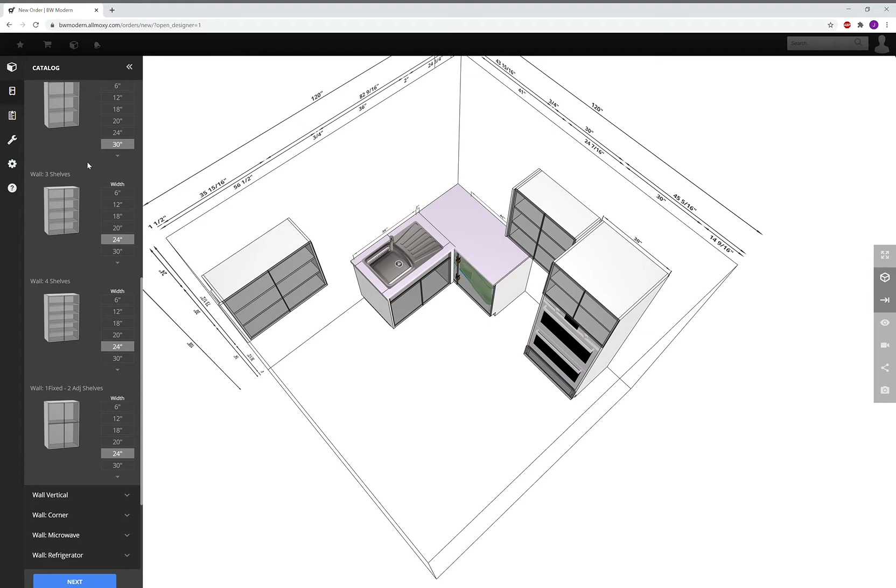Let's go over a couple examples of how I would use columns. This is our starter design from our applied ends video. I'm going to go down to ends and fillers, which is where the columns are located. We've got some different column options: base columns, wall columns, and tall columns.

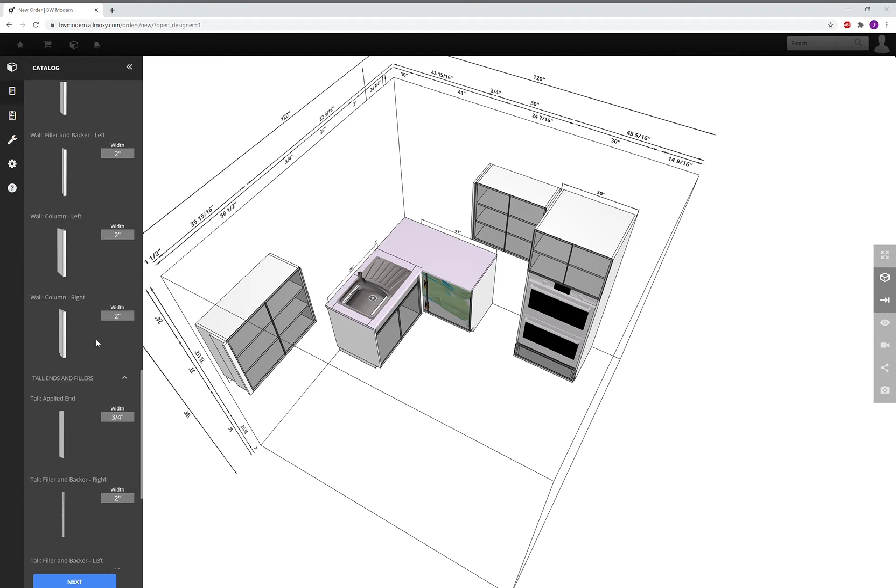Maybe I want to put some nice big substantial columns on this oven cabinet. If I click on this, I can see my closest tab here. I'll move this cabinet 3 inches off of that one. My end panel didn't like that, so I'll fix that real quick. Now I've got a 3-inch space from this upper to this oven cabinet.

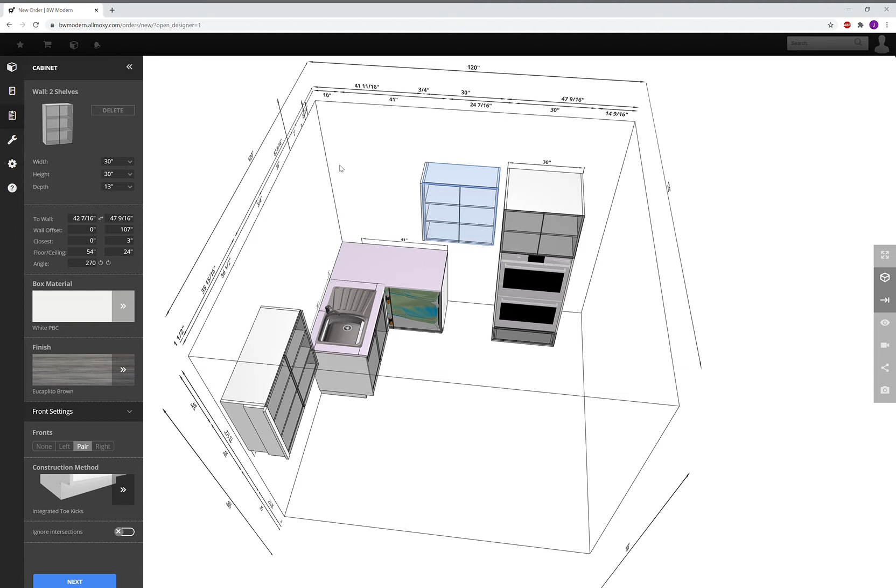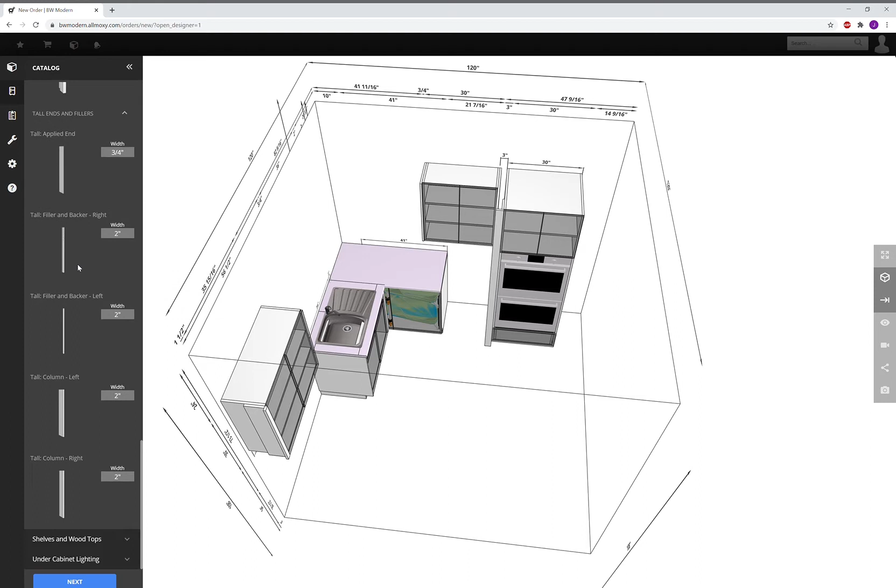I'm going to grab a tall column for the left, bring it in, stick it to the cabinet, and change it to 3 inches wide. It'll fix itself there. Then I'll grab one for the right hand side of my tall cabinet, stick it to the side, and make it 3 inches wide as well. You can make these columns any width you want—I'm just doing 3 inches because I like that size.

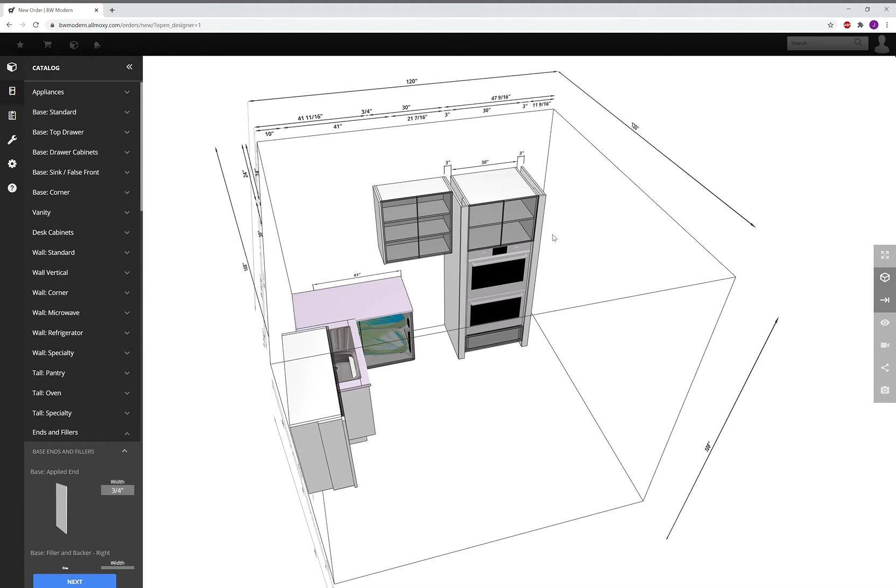Now you can see when we've added these columns, it gives that cabinet a really neat, substantial look—it looks like it's got legs on it. That's a neat way to use columns in a tall cabinet fashion.

Now there's another cool thing we can do here. Say I move this cabinet over to my sink cabinet, put it out here like this, and then grab the depth. I'm going to make the depth 26 inches deep, so that base cabinet is just a little bit deeper.

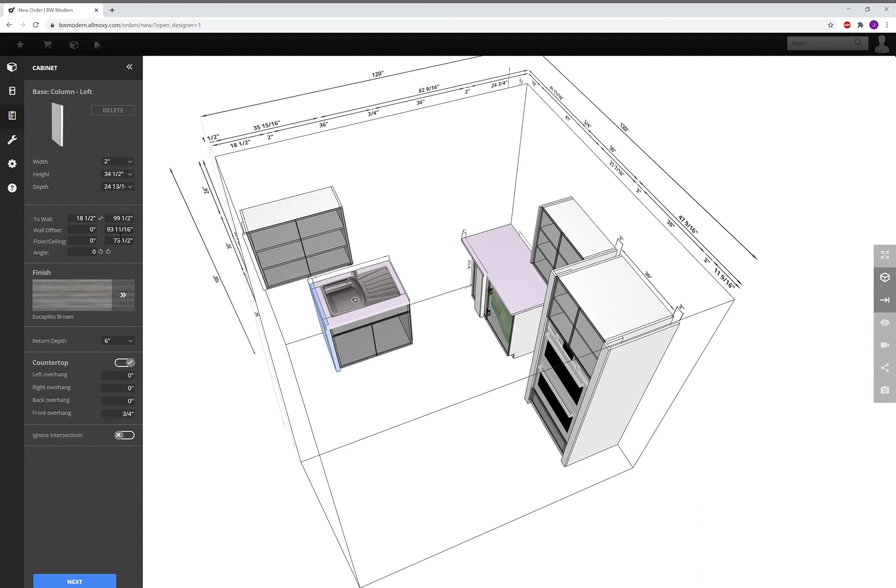Then I'm going to grab a base column left and stick it to it. I'll make that one 26 13/16 to match that depth, and make it 4 inches wide. So now we have a big leg on our sink cabinet.

So that was a left-hand one. Let's grab a right-hand one, bring it in, and make that one 4 inches as well. I'm going to change this depth to 26 13/16, and then move it over to the side of the cabinet.

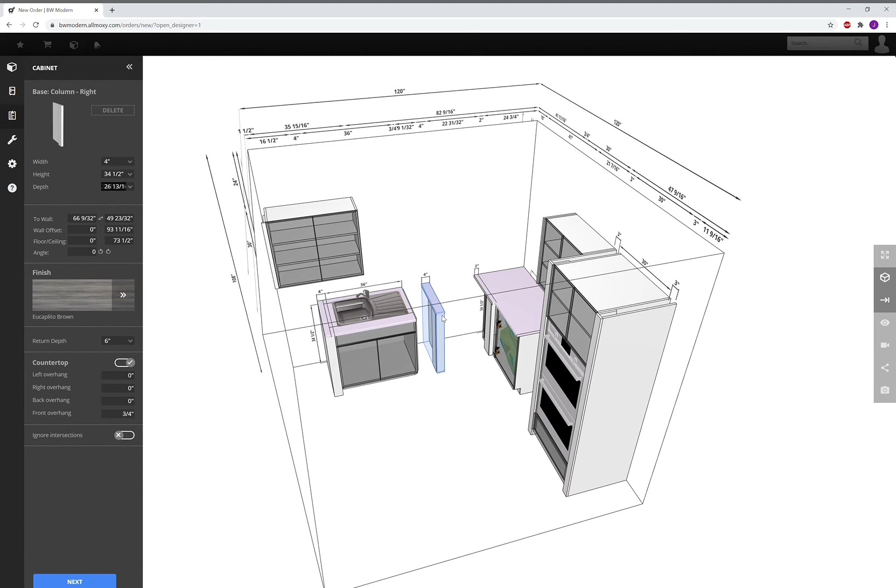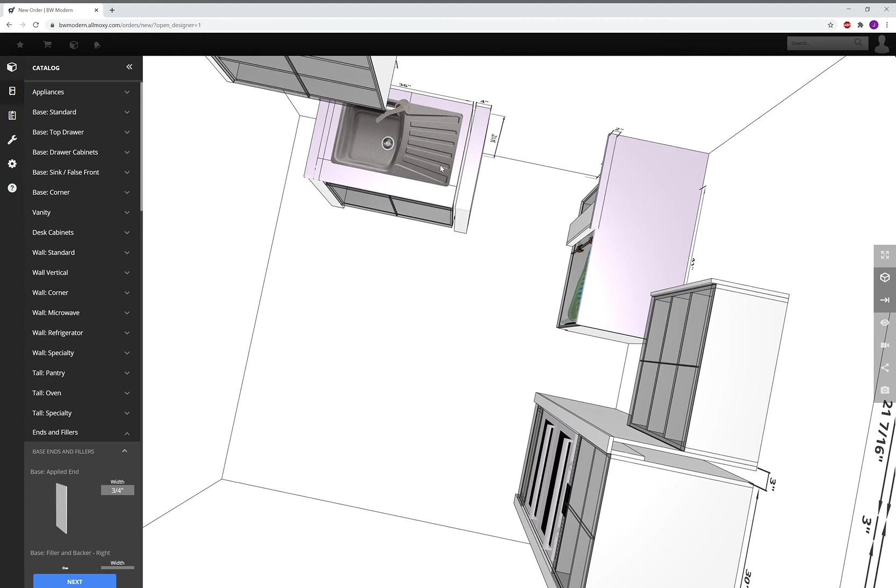Now this has given us a really cool kind of leg. Oh, there's an end panel there—let's get rid of that since we don't need it. Then we should be able to slide this over. Okay, so now we have our columns on either side of that sink cabinet.

Just to show you what it's going to look like, if I bring in a couple standard base cabinets that fit alongside it—we're not putting a lot of time into figuring out math for fitting a room, just showing how the columns look. Now we've got a couple 24-inch deep base cabinets on either side of our sink, and a 26-inch deep sink cabinet with a couple 26 and 13/16 columns on it.

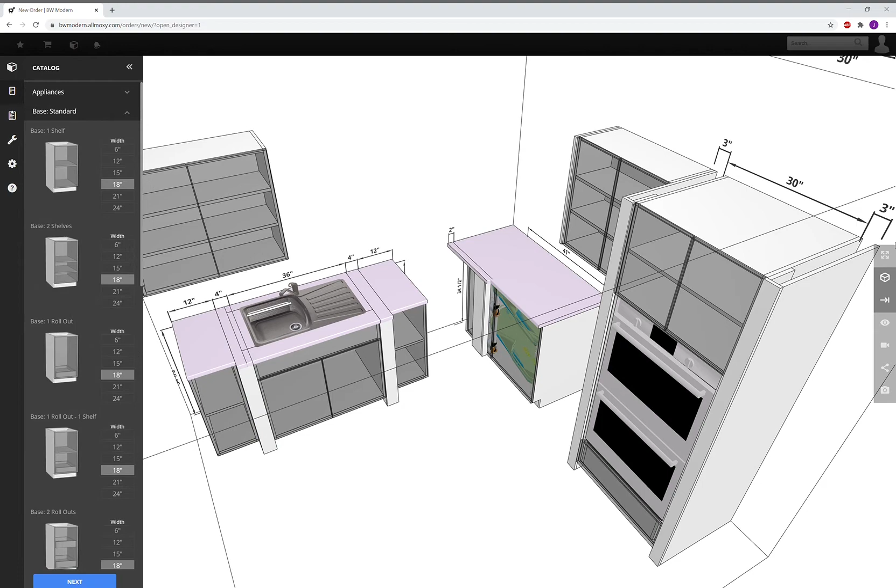Now when we render this, let's take a look at what this looks like. So now we've got a bumped out sink detail here with a couple legs on it—really a neat design.

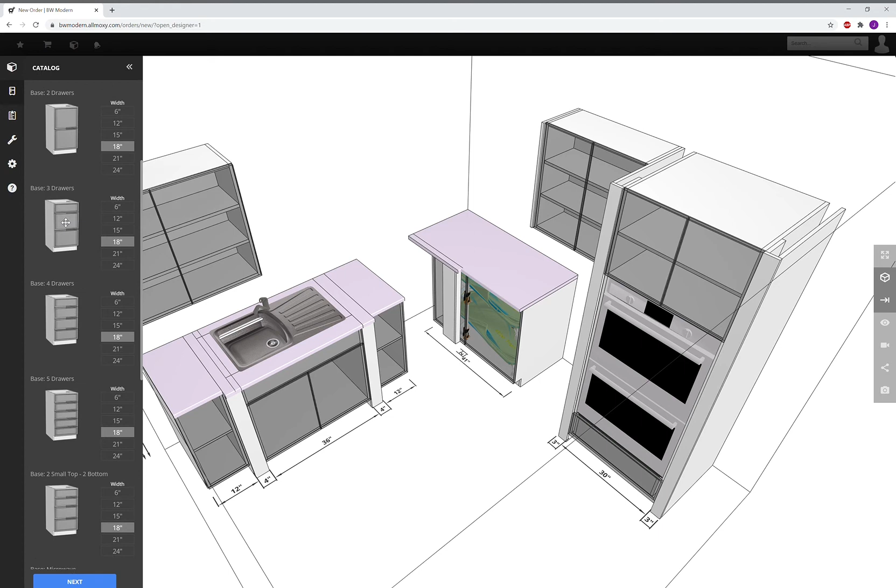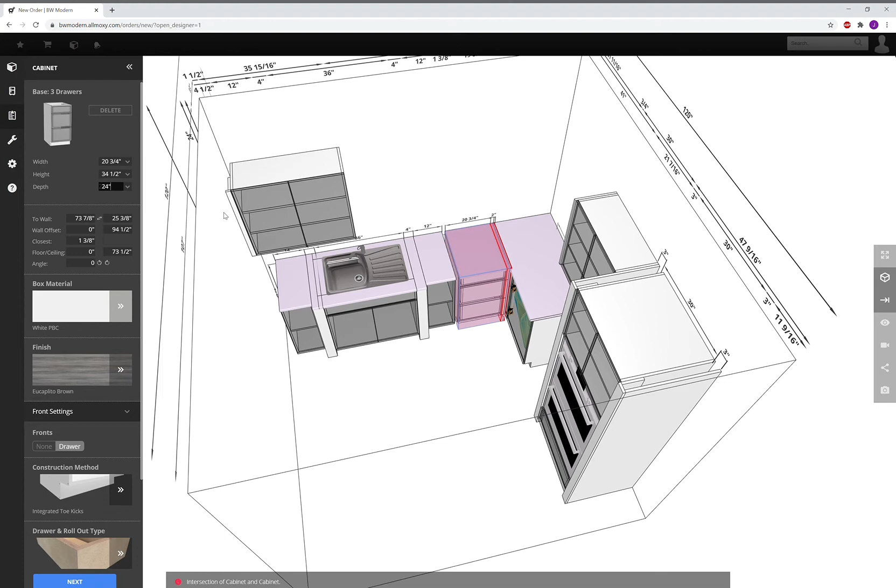I'm going to throw a couple more cabinets in here to finish up that corner so we can get a good idea what things look like. I'm going to come over to my drawer cabinets and grab a drawer. This also brings up a good point in kitchen design: I've got this cabinet at 18 inches wide, and the closest number here is 2 3/4. If I make this cabinet 2 3/4 bigger, which would be 20.75, since we can do all custom sizing, that's going to fill that gap.

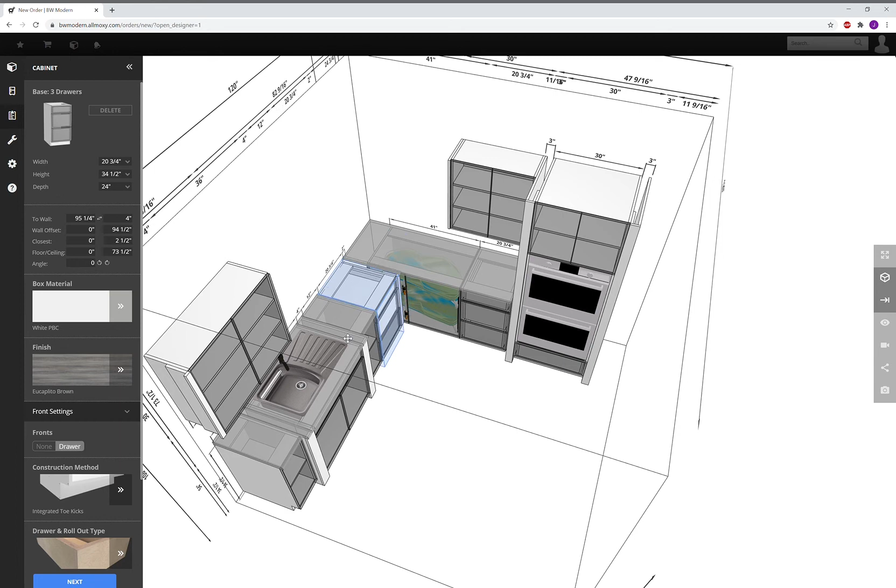Then say I want another drawer bank over here. It looks like I need 21 and 9/16. Let me get this in the right spot, and then I can make this one 21 and 9/16, since we have full ability to make things completely custom. Let's see what we've got to do to make this thing happy here.

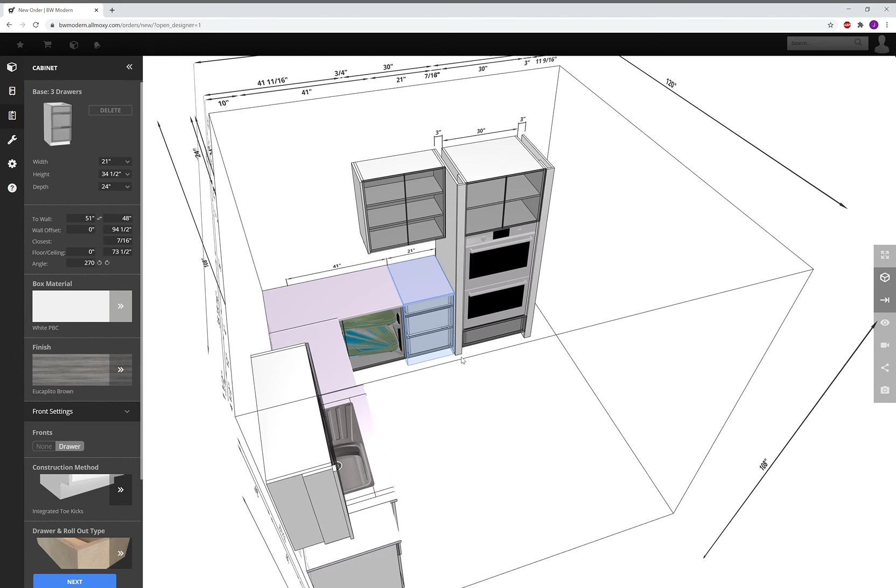There we go, now we're happy. It looks like it needs to be 7/16 bigger still, so we're going to make it 0.4375. Hopefully this fixes it—there we go, now we have it how we want.

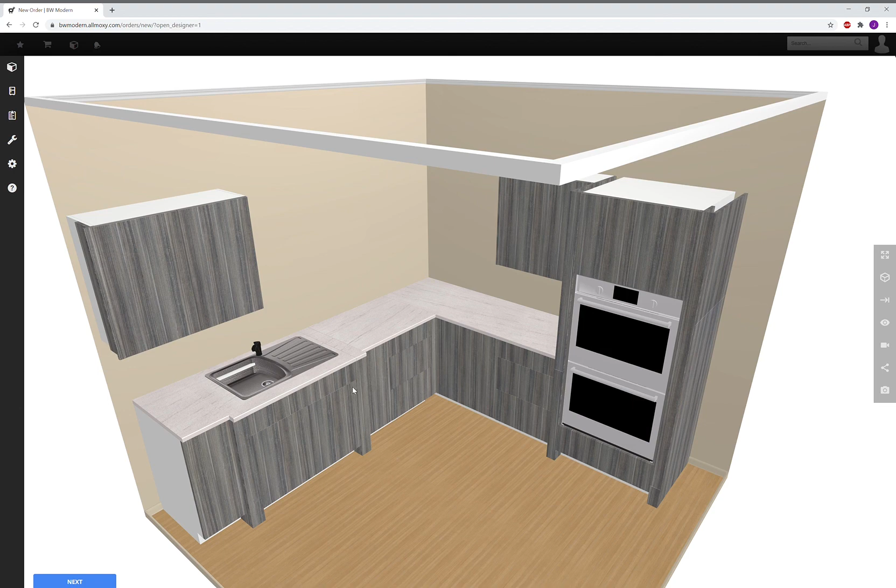Now that we have all those spaces filled in, when I render this we can see what it looks like using some of the columns and filling in the corners. Here you can see our base columns where we bump that sink out for a little more aesthetic appeal, and our tall columns on the oven cabinet, plus the filled-in corner. That's the overview on how to use the columns feature in the 3D Designer.

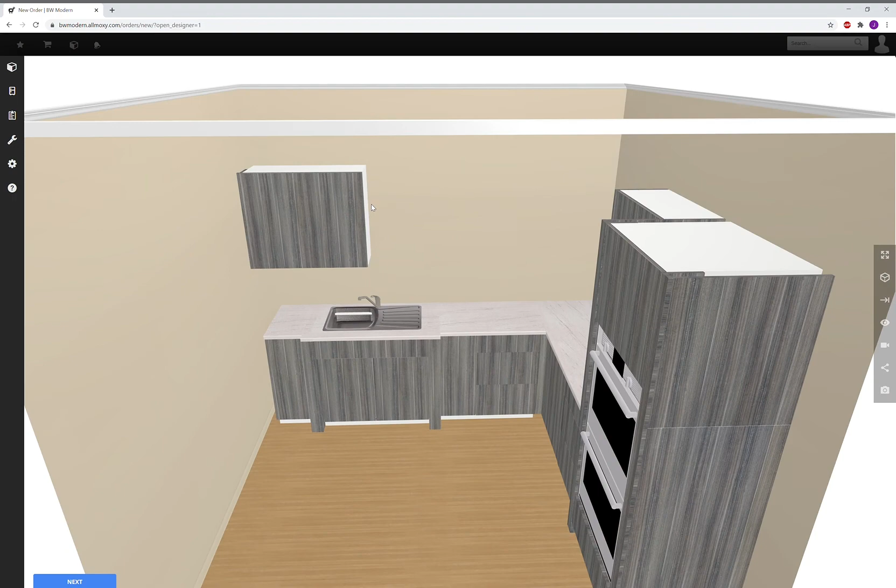It's a really cool tool to dress up your design a little bit. They work great on islands too—I'll make another tutorial just for columns on islands, since that's kind of its own animal. But this gives you an idea how to use these columns available.